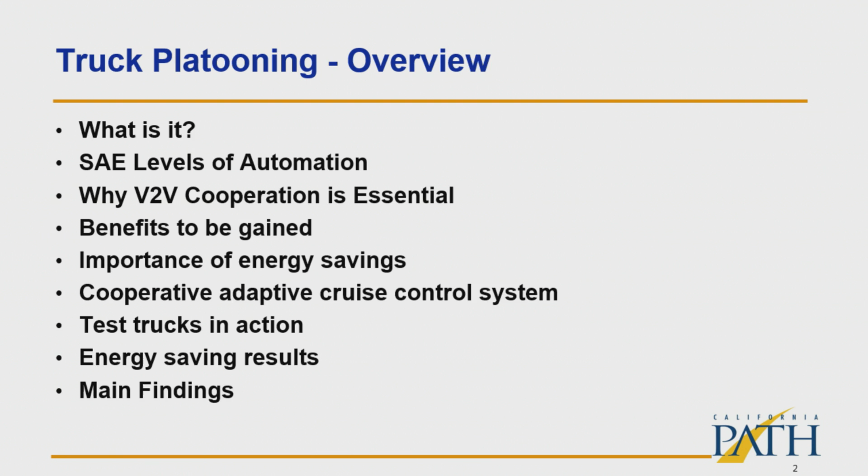So what is truck platooning? Well, it's operating the trucks in really close formation using automatic control of the speed of the trucks and taking advantage of vehicle-to-vehicle communication to coordinate those speeds.

We have data that is broadcast by each of the trucks, and the other trucks can listen to that data and can adjust their behavior accordingly.

We've been doing work recently on the cooperative adaptive cruise control version of this, which means it's an ad hoc combination of trucks. Any truck can enter or leave whenever the driver wants to, so the platoon can get longer or shorter depending on where the origins and destinations are of the different trucks. The drivers have that as their option.

The separation between the trucks is governed by something called a constant time gap, meaning the separation, the distance, scales with speed. As we get faster, they go a little bit further apart; as they get slower, they get closer together. That more closely replicates the way people drive.

Another way of doing this is what we call the tightly coupled platoon, and we've also done experiments on this in previous years. This is a case in which the first driver supervises the operation of the followers, and the joining or departing from that platoon would have to be authorized by the leader. They stay together unless the leader says somebody can enter or leave.

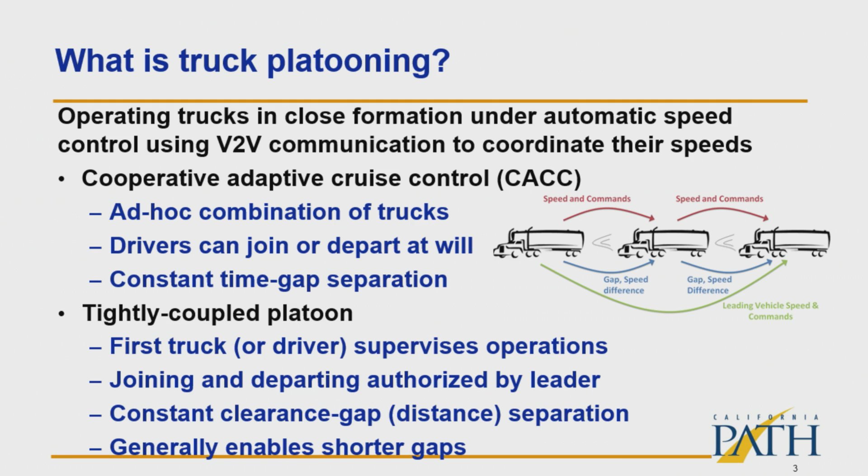Typically they operate at a constant spacing or constant distance gap. With that mode of operation, we can actually get them closer together, but it's also more challenging to get them controlled smoothly and accurately when we do the constant distance gap.

So I said I would talk about the SAE Automation Levels. This document is numbered J3016, published last September, and unlike most SAE standards, this one is available free - you can download it online from the website address listed there. This was developed by a task force of the SAE, of which I was a member.

There were about 8 of us who worked on that, to try to categorize the different driving automation systems based on what portion of the driving is done by the system, what portion is done by the driver. So there's a series of questions here.

Whether the driving automation system performs either longitudinal or lateral vehicle motion control, but not the other. And if it's just one of those, then it's a level 1 automation system. So adaptive cruise control is an example of level 1.

Then second is whether the driving automation system performs both the longitudinal and the lateral vehicle motion control. If it does both of those, it's at least level 2. Then we have to ask some more questions.

Does it also perform object and event detection and recognition? That means not just steering the vehicle and controlling the speed, but watching out for any hazards in the driving environment and responding to those hazards, which might be other vehicles, loads that fell off trucks, or any number of other things that represent a safety hazard. If the system also does that, then it's at least level 3.

The other question, number 4, is whether it also performs dynamic driving task fallback. Fallback means the ability to recover from any bad event. If it has that fallback capability, then it's at least level 4. Level 4 is the first level at which it's really possible for the driver to disengage from the driving task, or for a vehicle to operate with no driver on board.

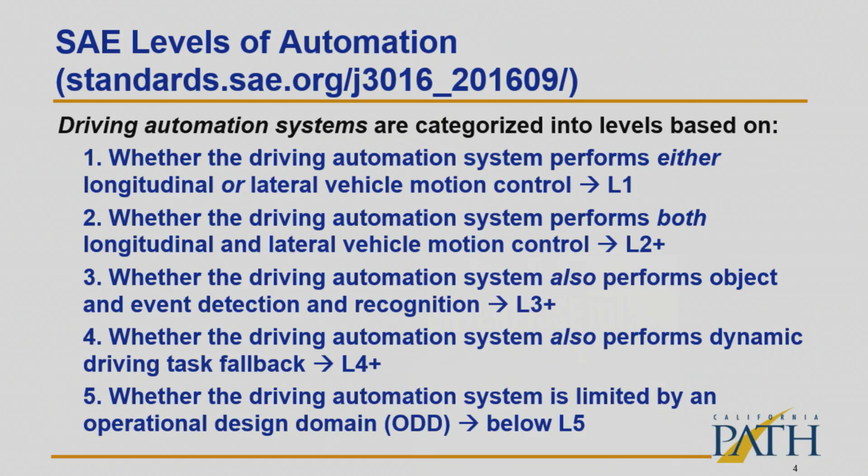Finally, whether the driving automation system is limited by an operational design domain, meaning the whole combination of weather conditions, road conditions, and traffic conditions that make driving complicated. If there are any limitations based on that, then it is below level 5. It only gets to level 5 if it's capable of driving under the full range of conditions in which people drive. Those level 5 systems are ones I would say we're not going to see in any of our lifetimes, including the youngest person in the room, not just old guys like me. So what type of systems would exist at each of those levels?

At level 1, you could have an adaptive cruise control system, or a lane-keeping assistance system that steers the vehicle while the driver performs the other function. At level 2, you could have the combination of adaptive cruise control plus lane-keeping assistance, and there are a variety of those systems on the market already.

Level 1 is pretty widely available in a lot of cars now, including mid-range cars. Level 2 systems are only available on a limited number of high-end cars. That's what the Tesla system is, for example, but Mercedes, Infiniti, and Volvo have them too, and just about every other major vehicle manufacturer, if they don't have it right now, will be introducing it within the next year. There are also parking systems that will allow the vehicle to park even after the driver has gotten out of the car.

But this is a case in which the driver needs to stand very close by the vehicle, either holding a smartphone or some other mobile device, to be able to intervene if there's any kind of problem and stop the parking maneuver. So this is a case where the driver has to monitor the driving environment to ensure safety, because the system does not have the capability of ensuring safety under all conditions.

So the driver does not have to be available to regain control when something bad happens. The driver could even go to sleep, but it's still only designed to operate within a limited operational design domain. So it might be only on a freeway in free-flowing traffic, or only on a freeway in very dense, low-speed traffic, or only in limited weather conditions. Maybe it'll do it in fair weather, but not in rain, not in snow. This is also the level where we could have a platoon of trucks in which the following trucks might not have a driver on board.

They could follow the leader, and although you would have a driver in the leader, the following trucks might indeed not have a driver on board.

There are also many people developing low-speed urban passenger shuttle vehicles that could operate within very constrained locations, like pedestrian malls, that would be at level 4.

And the idea of valet parking systems that allow the vehicle to go and park itself even while the driver is not supervising them. Finally, to get to level 5, we'd have the taxi that can take you wherever you want to go, or the truck that could do a delivery run without any supervision, could drive anywhere, and then the drivers would not be needed at level 5.

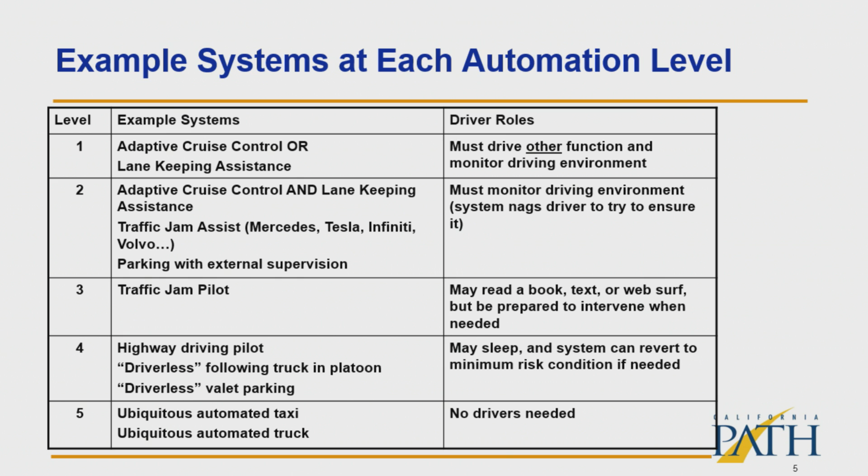For any of these, I believe communication-based cooperation is going to be essential. You need that data coming from sources other than the sensors on board the vehicle, because you need information that may be beyond the line of sight for the sensor, or it may be a type of information that no sensor is able to detect.

For example, if you're approaching a traffic signal, you might have a vision sensor that can detect whether that light is red or green. It has no way of knowing how many seconds remain on that red or green. But with communication from the intersection, it can tell the vehicle how many seconds are left on the red or green cycle. This helps to coordinate vehicle actions also.

Vehicles can communicate with each other, and especially when we're in a vehicle following mode, if there's an acceleration command or a braking command to a vehicle in front, the vehicle behind knows as soon as the command has been given. It doesn't have to wait for the speed of the other vehicle to change and for the sensors to be able to detect that that speed has changed. I'll show you on the video why that is critically important.

This has implications for traffic congestion, travel times, and energy consumption and emissions, because with the vehicle-to-vehicle communication and coordination, we can really smooth out the traffic disturbances. We can also get the vehicles close enough together that they can start getting benefits of aerodynamic drafting, and that becomes a big deal for trucks.

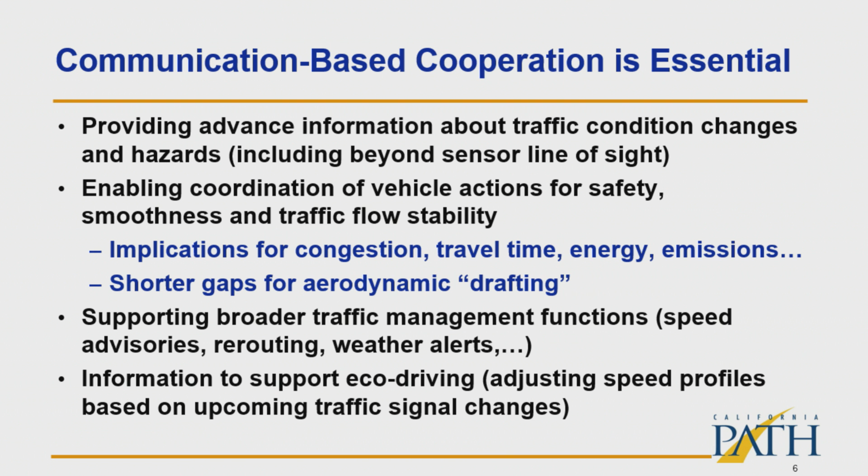Particularly, eco-driving is an opportunity: if the vehicles receive advanced information about things like traffic signal changes up ahead or traffic flow problems further up ahead, they can start adjusting the speed profiles earlier and actually get to much smoother acceleration and deceleration profiles, and can even avoid having to stop at traffic signals if they have the information to know that they can coast through the traffic signal.

So I mentioned the importance of the communication. I'm going to show a couple of videos here with adaptive cruise control. The left one I'm going to show first. This is now production adaptive cruise control on 4 vehicles. So they are autonomous, which means there's no communication between them. They're simply vehicles that the manufacturer has equipped with the adaptive cruise control.

What we've done is we've commanded a gentle speed change profile to the first vehicle, and then we'll have the followers. So the lead vehicle is now accelerating at 0.05 Gs, and the followers are trying to keep up with it. Then it'll go to a constant speed cruising. Now it's at constant speed cruising. Notice we got braking on the 3rd and the 4th car. Those are left over from some earlier disturbances.

Now the vehicle's decelerating at 0.05 Gs, and the sequence of brake lights took 5 seconds to get to the 4th vehicle. We'll see this again. Now they're at constant speed again.

Then we're going to repeat the maneuver. The lead vehicle accelerates at 1/10 of a G. This is still a fairly gentle acceleration. 4th vehicle's got its brake lights on because it's still oscillating from the previous disturbance. Now they're at constant speed, and now watch the brake lights. Decelerate at 0.1 G, 2nd car, 3rd car, 4th car. That's a 5-second delay after the braking of the 1st car.

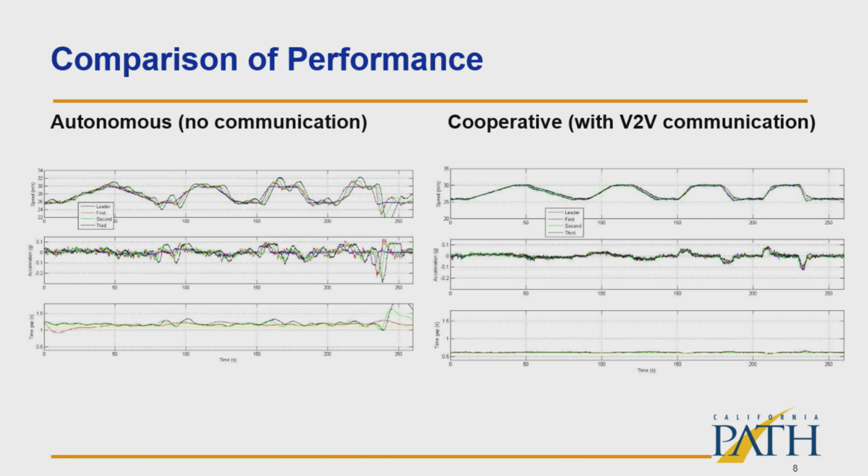We've taken lots of visitors for test drives on the car, and almost everybody gravitates towards that short gap setting. So the test data, what we were showing on the video, was the second half of these plots. On the left side, the one without communication, you can see all the oscillations. Indeed, when the first vehicle was braking at 1/10 of a G, the fourth vehicle was braking at 3/10 of a G—we got an amplification factor of 3. On the right side, you see the smooth profiles, because with the cooperative system, they were all driving in sequence with each other.

So what type of benefits could we gain at each of the automation levels? This now assumes we've got that communication to enable cooperation, because if we don't have the communication, these benefits go away. So level 1 will get some comfort and convenience for the driver. We should have some substantial energy savings, both from smoothing out the speeds, as we showed here, and also from drafting, which I'll show in a few later slides. And we should get some safety, because we're providing collision warning information to the drivers to help them better avoid collisions.

At level 2, we could get some additional comfort and convenience. We could get additional energy savings if we get the vehicles closer together. So if we get really close together, we have to automate the steering as well, because it's too hard for the driver of a following truck to steer if they get really close to the leading truck. But there might be a reduction in safety if the system is misused by the driver, and there's a lot of evidence of drivers misusing level 2 systems—they treat them as if they're level 3 systems. Indeed, several Tesla drivers have died because they assumed that their level 2 system on their Tesla was a level 3 system, and they stopped monitoring and paying attention. And when the system encountered a situation it couldn't handle, they had some real serious crashes.

At level 3, you've got the potential for the driver to do some non-driving tasks. So think of the truck driver who can now become a logistics manager. He can be communicating with his dispatcher, he can be communicating with his customers, because he doesn't need to pay constant attention to what's going on the road.

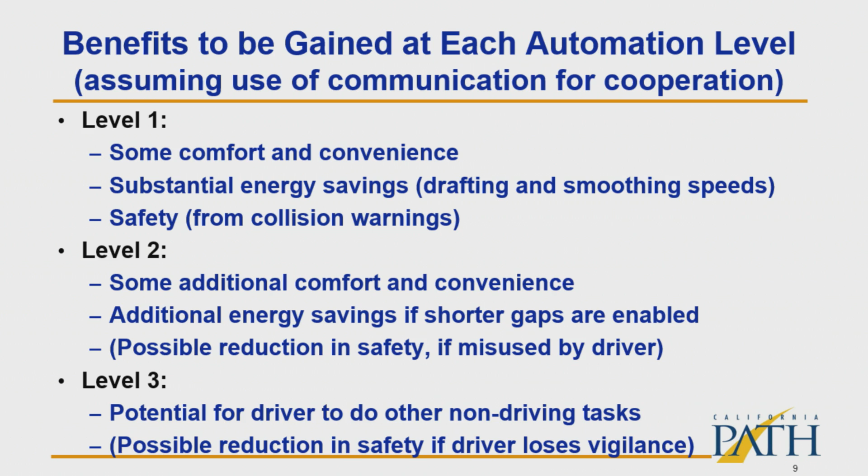But if the driver is not able to re-engage with the driving task and maintain their vigilance, we could actually have a reduction in safety. At level 4, the driver can actually do all those other things without any safety hazard, because at level 4 the system has to have all of the built-in backup capabilities. So this really improves the driver's quality of life, turns that driving job into something much less stressful.

In trucking, the hours of service restrictions are a really big deal, so there might be an opportunity to reform hours of service regulations so drivers can actually be on the road for a longer period of time. That's where you get the possibility of driverless followers in a platoon of trucks, which can save labor costs for those following trucks. And because there is built-in fallback capability, there really should be some enhanced safety.

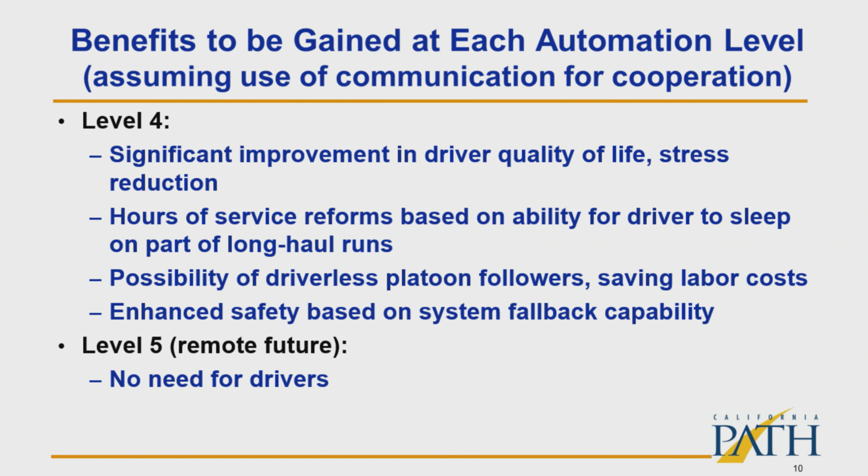Of course, at level 5 in the very remote future, then you wouldn't need drivers. But I always tell people, don't worry about any drivers who are driving today. This is not going to happen. They'll be able to retire before level 5 becomes a reality. They're not going to lose their jobs in the next 5 or 10 or 15 or 20 years.

Yes, really. So when we get to heavy trucks, energy savings are really important. Heavy trucks consume about 20% of all the energy used in transportation in the U.S., and they consume about 14% of all the petroleum that we use in the U.S.

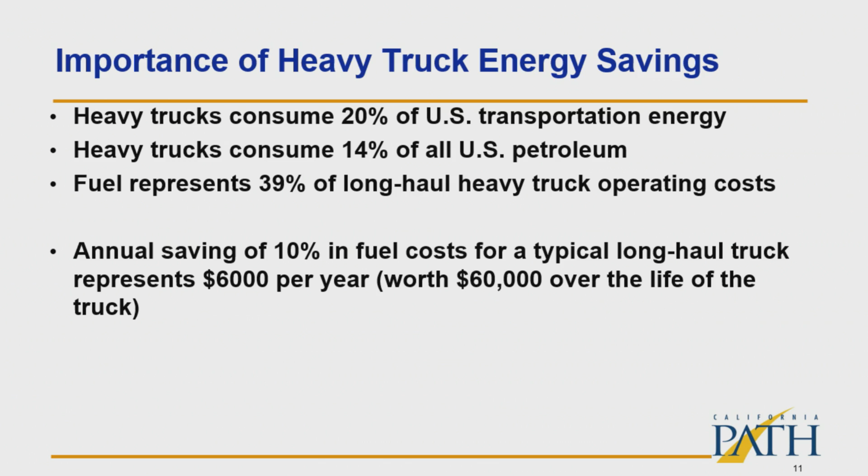From an individual truck operator point of view, fuel represents 39% of their operating costs when they're doing long-haul driving on the highway. So if they could save 10% of the fuel costs for a long-haul truck, that's on the order of $6,000 per year, which could be worth $60,000 over the life of the truck. Well, these systems, at least the level 1 systems of the type I'm going to show you, won't cost anything near that. So there's a big return on investment.

So we've been doing some work under the Federal Highway Administration's Exploratory Advanced Research Program, together with the California Department of Transportation and Volvo Trucks, and we've actually implemented a cooperative ACC system on 3 Class 8 trucks. We've measured the energy saving that we can get on the test track, and in the next couple of months we'll be doing some experiments with drivers to determine what their preferences are among the different available gap settings. We're also simulating what the impacts are going to be on traffic and energy use in a high-volume freight corridor.

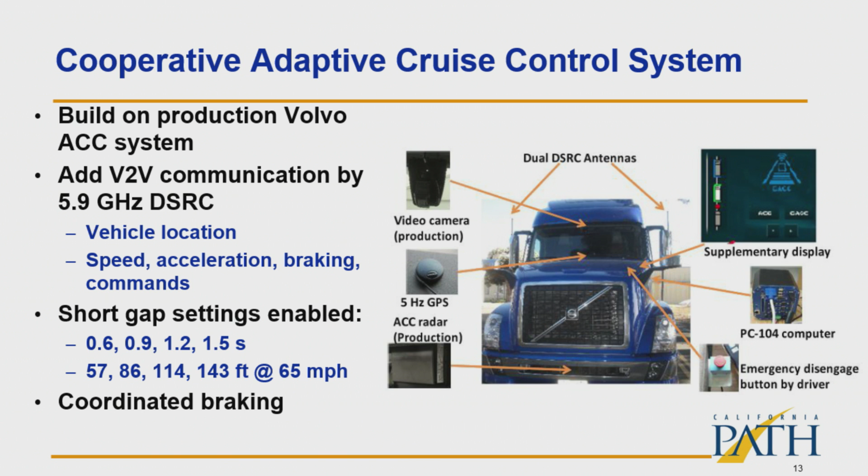And then this also includes coordinated braking. So if any of those trucks applies the service brakes, then that braking command goes to all the trucks behind. There's also an emergency disengage button in case any of our stuff doesn't work right, the driver can disengage.

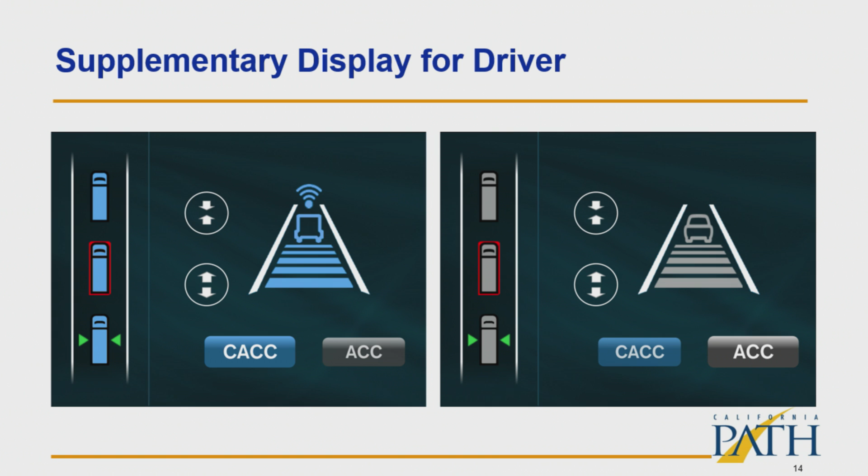And there's a supplementary display that tells the driver the mode the system is in. It shows the status of the other trucks that they're coupled with. It shows what the gap settings are, so the little arrow buttons are used for the driver to select whether they want to get closer together or further apart. The red border around the truck icon tells the driver that that truck is actually applying the brakes, and little green arrows show which position this particular driver is in. So they know where they are relative to the others, and they know if anybody is braking. There are also some icons to indicate if there are any failures on any of the trucks.

So we did a series of very careful experiments this past fall in collaboration with Transport Canada and the National Research Council of Canada on a test track north of Montreal, following an SAE standard test procedure that's very rigorous. Each test run is a 64-mile continuous run, 16 cycles around this 4-mile track. And then we do 3 of those runs under the same conditions and average all the results to get fuel consumption measurements.

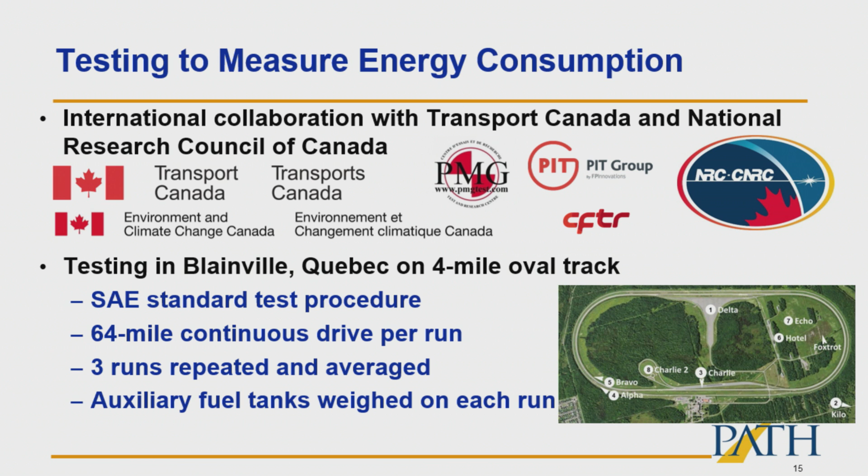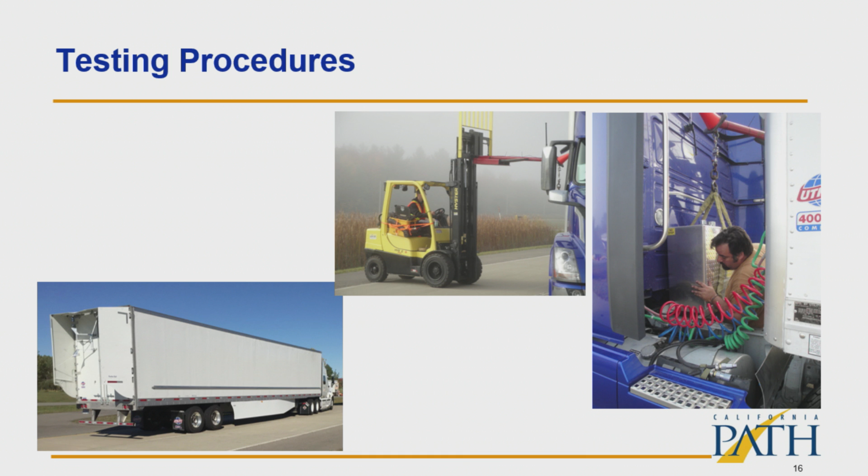The fuel consumption is measured by weighing the fuel tanks before and after each run. There's an auxiliary fuel tank, which you can see with one of the researchers off on the right, that gets weighed by a forklift truck that has a load cell at the end of the fork, so that it's weighed before and after each run to measure how much fuel was consumed.

Transport Canada was also really interested in how this combines with side skirts and boat tails on the trailers as an energy saving measure. So we did tests with standard trailers and with trailers that had the aerodynamic modifications, which are shown on the truck on the left. Let's show the video from that test track testing.

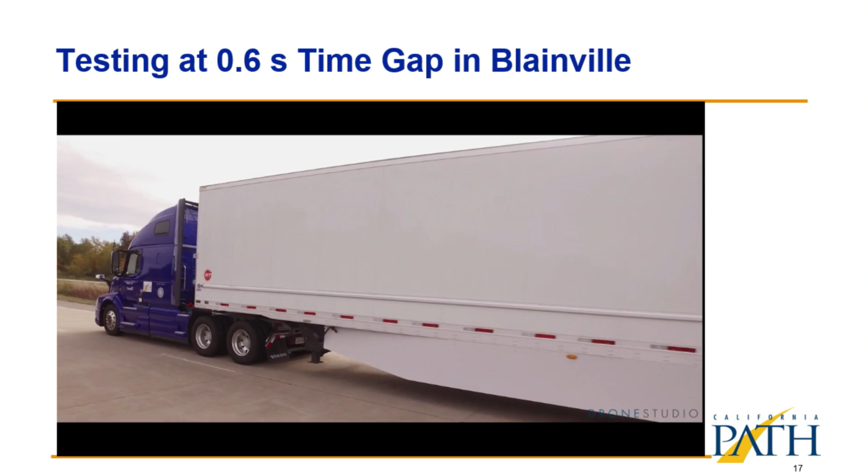Let's turn the sound off. This is in Blainville, Quebec. That test track is owned and operated - it's owned by Transport Canada, and it's operated by a company that works very closely with them. This is an 18-wheeler, an over-the-road truck with a big sleeper cab configuration.

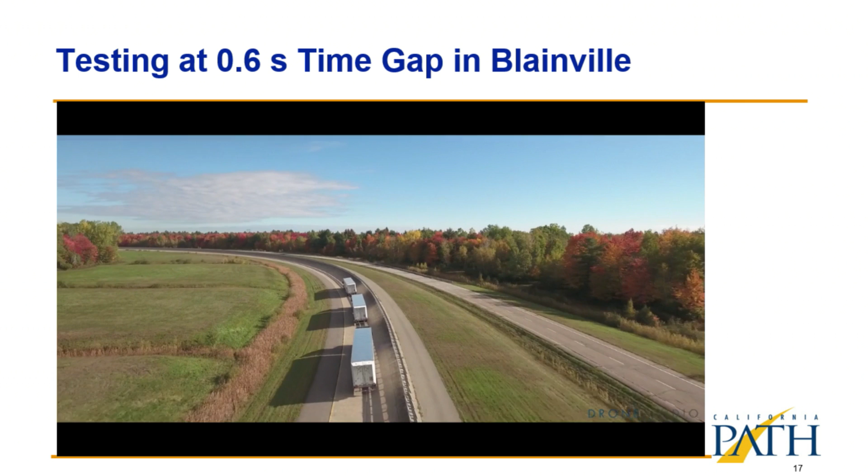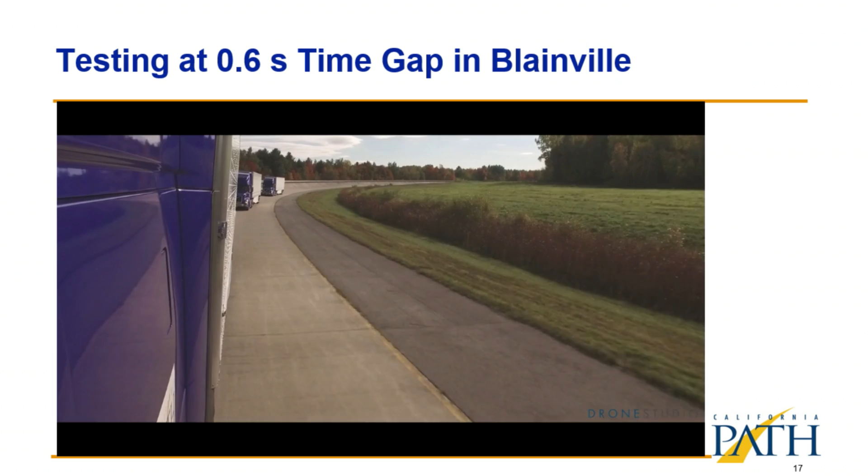Here you see them on the track. This is at the 0.6-second gap, so that's the minimum gap of the gaps that we tested. We tested them driving individually to set the baseline - that's the baseline fuel consumption when they're not coupled together closely. And then we measured the fuel consumption under these different conditions when they are coupled together using the cooperative ACC system.

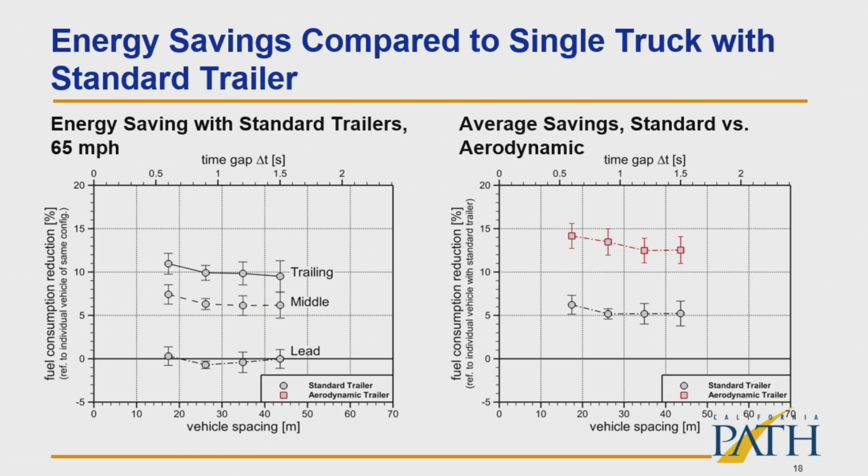Now, we need to do more experiments at both longer gaps and shorter gaps to fill out both ends of that curve. And in fact, we're going to do some of those experiments this coming summer.

So, main findings from this: with the standard trailers, the trucks can save about 5% on average, when we average together the results from the first, second, and third truck, it came to about 5%. With the aerodynamic trailers, that grows to 12 to 14% compared with the standard trailer solo driving. In this range we were testing, they're not very sensitive to time gap values. The lead truck saves very little, if any, and the third truck saves the most.

Other experiments that we and other researchers have done have shown when you get closer together, the lead truck also saves some energy. So the effects of the short gaps and the aerodynamic trailers actually reinforce each other, and we're going to go on and study both shorter and longer gaps this summer.

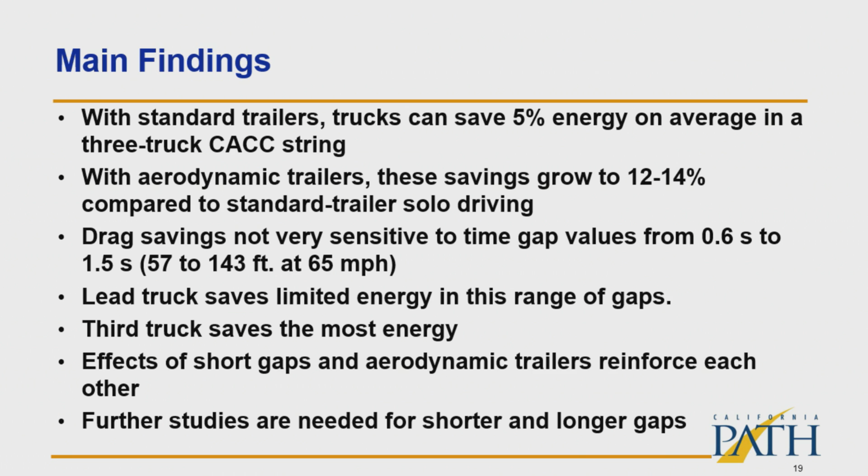So with that, I can conclude my prepared remarks, and we'll see if there are any questions I might be able to answer.

Question: Is there any traffic implication to having these trucks stacked together and not allowing cross-flow traffic if someone needs to exit? Answer: Yeah, so there are traffic flow implications when we get the vehicles closer together, and there are two effects that work in opposite directions.

One is if they're too close together, then that impedes lane changing by other vehicles. But if we have them closer together, we actually get a higher volume of traffic throughput. So we've been doing some really detailed traffic simulations on that to try to see how those two effects balance each other.

But I will tell you, even when we drive at that minimum gap that you saw in the video, we do that on public freeways in California. We've got people cutting in between us all the time. People will cut in between when we're near on-ramps and off-ramps. So at an on-ramp, somebody wants to get into the freeway, they will come into the 0.6 of a second gap. Near an off-ramp, somebody didn't get in the right lane early enough, they'll cut right between us to get to their off-ramp.

Yes, so the system detects the cut-ins and then it will back off. And because those vehicles are unequipped, they're not telling us what's going on, so we have to allow a larger gap behind them. After they've left, we rejoin with our leader and reform the platoon. Of course, we've lost energy savings during the time we've had the cut-in. This is one area we want to test with a representative sample of drivers from the general driving population.